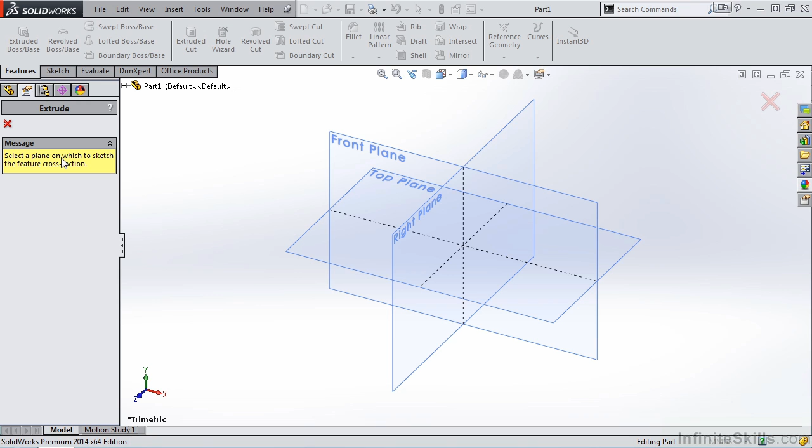So I'm going to select the front plane. The plane rotates around, and I am taken into the sketch ribbon. And to keep this simple, I am going to create a center point rectangle. As soon as I create the rectangle, I'll close out of the sketch, and the Property Manager opens for the Boss Extrude command. Now the first thing we want to talk about is the depth of the extrude.

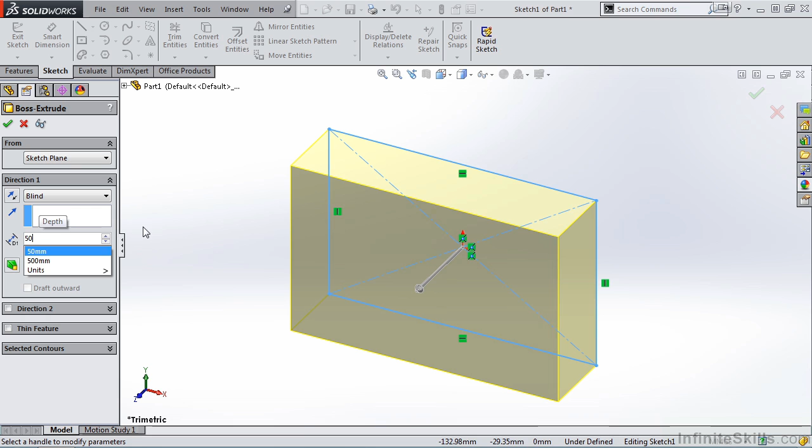Notice we can change the depth by clicking the up-down arrow, and the preview updates on the screen, or we can key in a value, and we need to click outside of this window for the preview to update. Or we can grab the arrow you see on the screen and stretch it to the front side of the 2D sketch or the back side. Now currently on the screen, the extrude is being created to the front side of the 2D sketch. We can reverse that direction by selecting the Reverse Direction button.

Notice under the Direction 1 Property Manager, we also have the capability to apply a draft. So if I select the Draft button, notice it defaults to 1 degree. I can increase this so we can see the draft on the screen. And this is currently drafting inward, but we do have the checkbox for draft outward.

I am going to turn off the draft, and let's go back to the top of the Property Manager for Direction 1. The end condition is set to blind. That is nothing more than a specified distance away from the sketch. We also have some other options which are used when you have an existing model on the screen. So for example, we could extrude up to an existing vertex, up to an existing surface. We can offset from a surface, or up to a body.

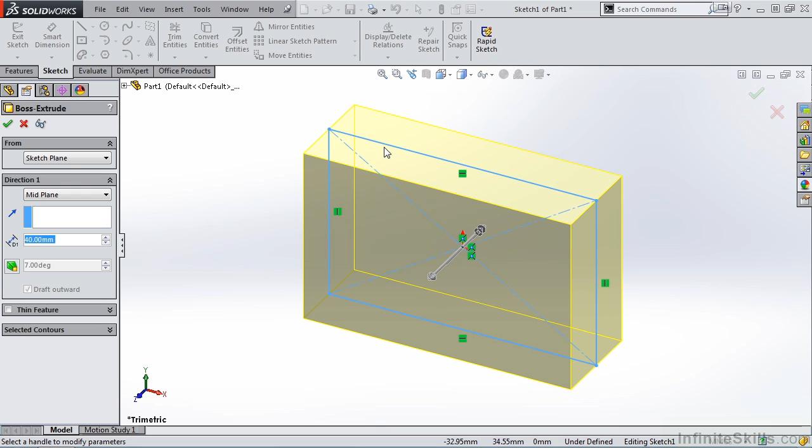However, the two common end conditions are blind and midplane. Now if I set it to midplane, notice my depth is 40 millimeters. That 40 millimeters is equally split around that 2D sketch. So it's 20 millimeters to the front side and 20 millimeters to the back side. I'm going to return it to blind, and we will place it at 40 millimeters to the front side of the 2D sketch.

We also have this window here. This is for the direction of the extrusion. The default is to extrude normal to the 2D sketch. But if I select an existing line or edge on the screen, I can extrude in a direction other than normal to the 2D sketch.

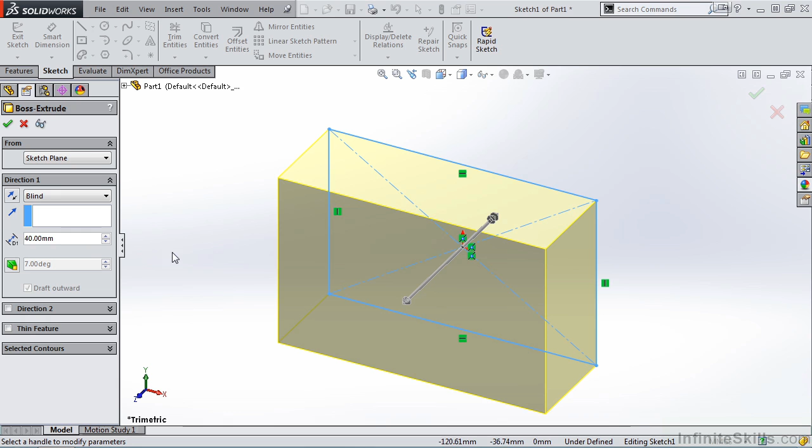Now, if you have a need to extrude a different direction, for example, we want to extrude 20 millimeters to the back of the 2D sketch, but 40 millimeters to the front, that's when we would activate Direction 2. And I am going to change this to 20 millimeters. And notice the preview update. 40 millimeters to the front, 20 millimeters to the back. We also have many of the same end conditions, along with the option for draft. Now, I am going to uncheck Direction 2, and I am going to close out of the Boss Extrude command.

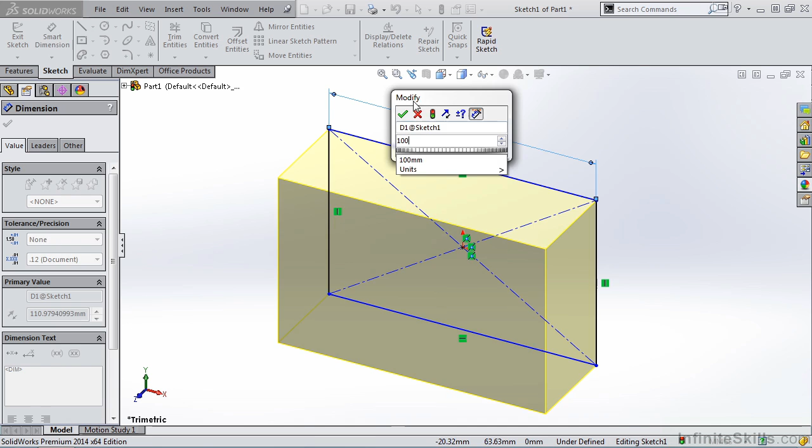Now let's take a look at the Feature Manager tree. If I expand the Feature Manager tree and select the plus sign, I see Sketch 1. That is a 2D sketch I created. At any point in the design process, I can return to this sketch, select the sketch, and then select the Edit Sketch icon, and I can make changes to this sketch. I can add smart dimensions or other sketch features, and when I close out of the sketch, the extrude updates.

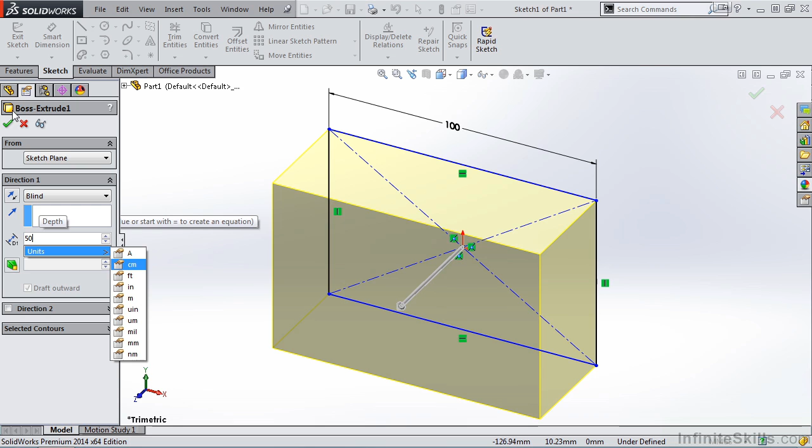I can also edit the extrude by selecting the extrude feature and then selecting the Edit Feature icon. I am taken back to the same Property Manager as when I created the extrude. If I want to change this depth to 50, I simply key in 50, close out of the Boss Extrude command, and my model updates on the screen.